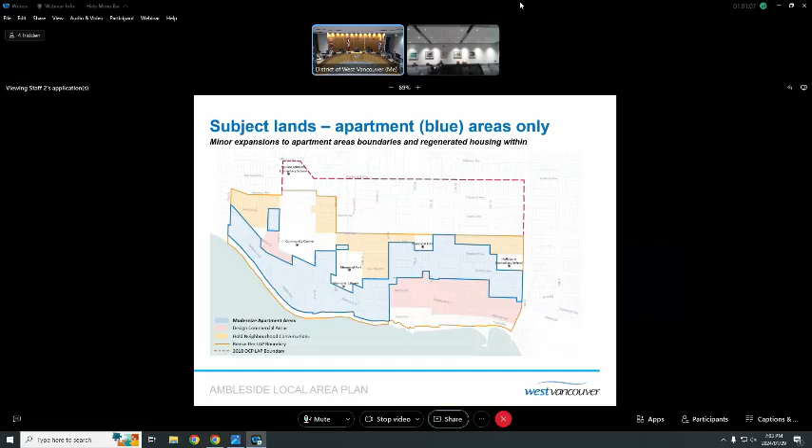Also, just to be very clear about the subject bylaw, I'll describe its nature. It relates to the OCP, or Official Community Plan. Council already has within its Official Community Plan policies that relate to the existing apartment area, and this would update those. The function of an OCP is to identify the kinds of housing that council could consider and where. Importantly, the OCP also includes design guidelines specific to the apartment area.

No changes to these are proposed. So the design guidelines regulate things like the look and feel, the design of buildings.

I'll also take a moment to clarify what tonight is not about. So this is an OCP amendment as described. It's an area-wide long-range policy document. It's not changes to zoning.

So included within that statement, it's not a reconsideration of protecting the 30 purpose-built rental sites. I'm flagging that just because I'm aware there's been significant public interest and correspondence. That bylaw was defeated at the end of November last year.

Council can, of course, direct any next steps for those sites tonight or at any open meeting, but should council choose to do so at any time, that would be a separate bylaw, i.e. the zoning bylaw, not the OCP. So a long way of saying that the OCP bylaw in front of council tonight can proceed irrespective of any potential direction council may provide regarding the zoning of the 30 purpose-built rental sites.

Thank you, Mr. Hawkins. Just on that note, I believe that council will give direction on that issue of protecting the rental housing sites sometime in the not-too-distant future. Thank you. Perfect, thank you, Your Worship.

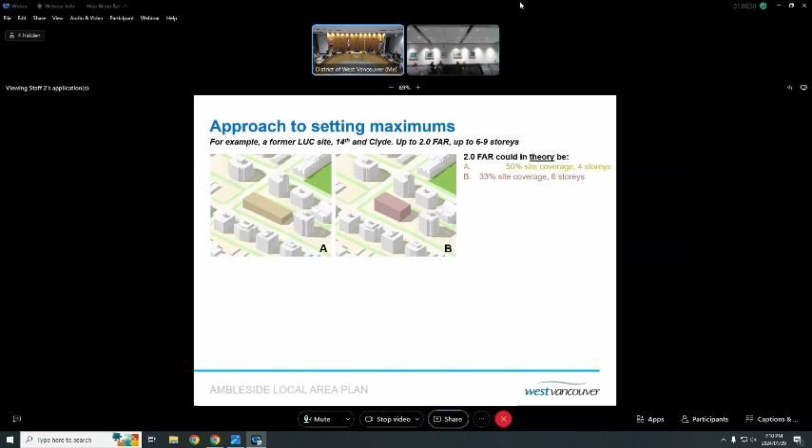Could have even less site coverage, 25%, and be 8 stories. So this is just a theoretical massing exercise to illustrate how density and height work together.

In practice, not in theory, what would really happen is that should council adopt this bylaw, those maximum up to heights and maximum up to FARs provide an envelope. It would be owners that determined if they wish to apply. Market economics would very much inform what was a viable project.

Architects would shape a site-specific response. Staff would review using things like those design guidelines I mentioned. And ultimately, it would be council that decided based on the fit, so what the building looks like, but also what the building contains, its housing.

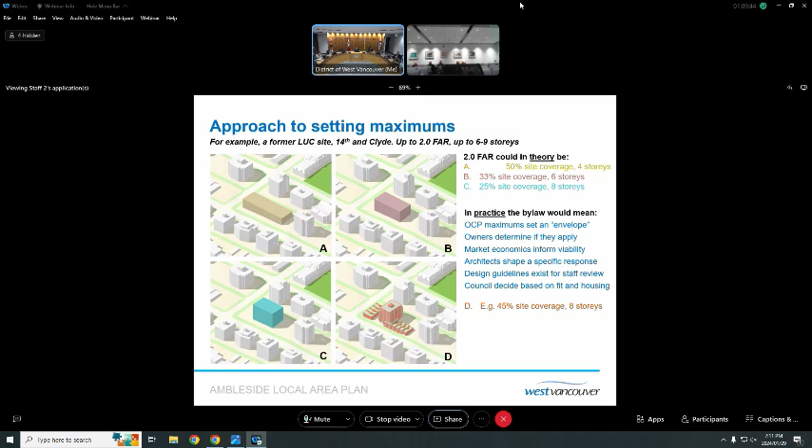And so it could be that this kind of policy would enable something like image D on the screen there, where it could be 45% site coverage, 8 stories, but a narrow 8 stories located in the space between the two buildings abutting to the north, with things like townhouses fronting the two streets.

So you could get a mix of the 3 and 4 bedroom townhouse units, as well as the 1 and 2 bedroom apartment units. So it's just an illustration, but it's trying to describe the kinds of things that policy can enable over the coming decades.

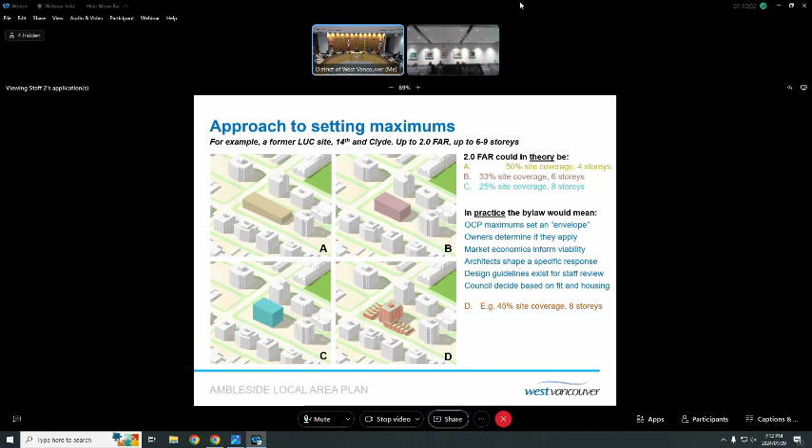The previous bylaw indicated a maximum infill across the site, total FAR of 3. The options in front of Council now in the revised bylaw provide a staggered approach, a more nuanced approach.

So we're proposing if the infill building is strata, it would be 2.5 FAR, gross total on the site. If there's a sort of interim combination of strata and rental or rent to own, that would be 2.75. And then the 3.0 maximum FAR could be applied not only to rental projects, but also to co-op infill.

And for full transparency and awareness, the proposed policy I'm describing on this slide still retains the language that heights would be determined through contextual review of the proposal. It's the only policy in the revised bylaw that includes that language. All others have been specified.

And this is really just having done the analysis, we have 3 sites, 3 contexts, 3 amounts of available space where an infill building could be located. And now with greater options, we also have 3 different scales of density. So it makes picking an absolute limit a little arbitrary, if you like.

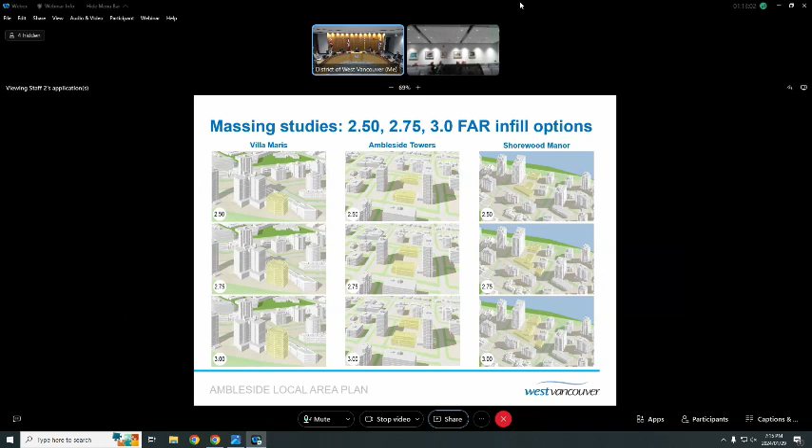Could be a 1, 2, or 3 building proposal, depending on unique site conditions and varying densities. So I've already begun moving on to the visualization piece, which was one of the key inputs staff received in October, the desire to provide illustrations so the words don't float in an abstract way, so people can really understand what these bylaws could lead to over the coming decades.

Our approach has been to prepare an appendix, Appendix C, attached to the report and the bylaw. These images show existing buildings, always in white, modelled to scale and to reflect the topography and slope. In colour, potential buildings are indicated, colour-coded to the various proposed policies. These are massing studies, and we've included a range of different angles and perspectives, some close-up, some wider, looking in different directions.

A few important caveats: Appendix C does not show actual buildings. There's no detailed design, no particular architectural response proposed, no landscaping, texture, or character. Real buildings would have doors, windows, trees in front, and so on. The images do not show approvals or even applications—we're not at the application stage. Policies would guide applications, but should Council adopt these policies and applications be received, they would be subject to detailed design review and Council decision-making.

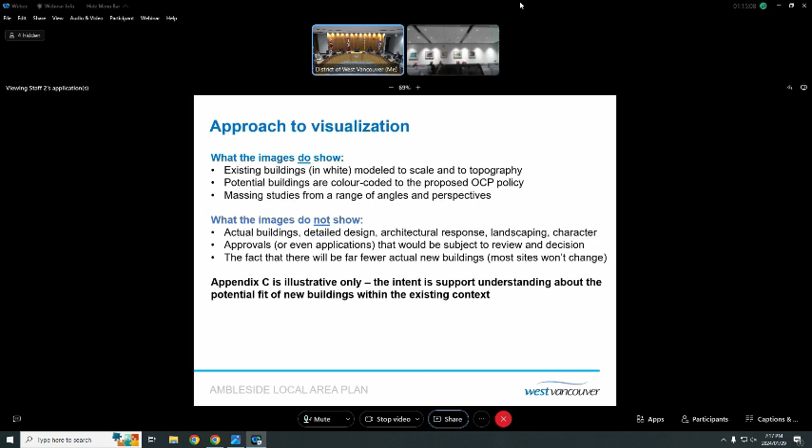They also don't show that there will be far fewer buildings than the total build-out illustrated, because the density increases are by and large quite marginal, meaning most sites won't change, at least within the 2041 OCP planning horizon. So the invitation is to view Appendix C as illustrative in nature, intended to provide council and the community as much understanding as possible about the potential fit of new buildings within Ambleside's context.

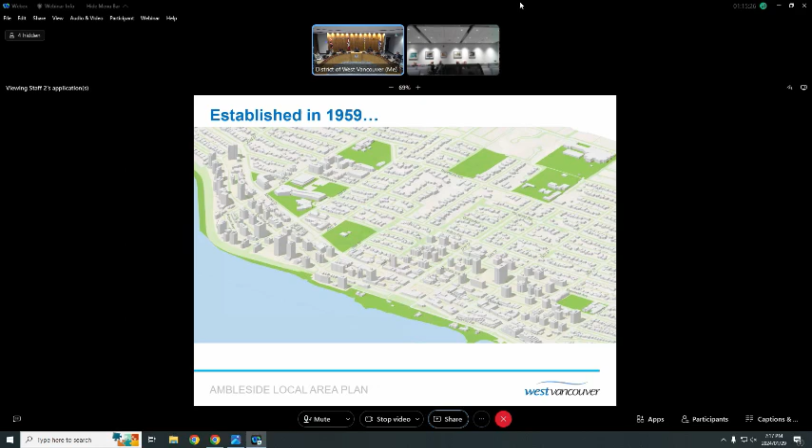Appendix C is fairly long, I'll only provide a few examples. Looking northwest, here are the existing conditions—what we have on the ground today is the result of a decision made in 1959. The appendix illustrates how, question mark, perhaps by 2059, these kinds of housing could fit and relate to existing buildings, slope, and context based on these massing studies.

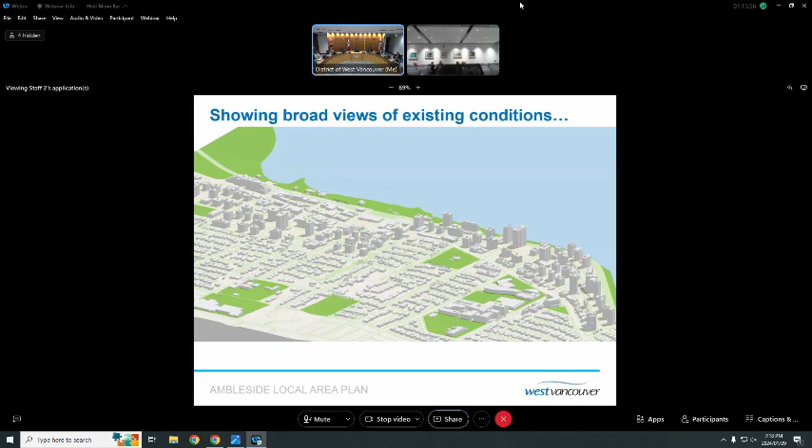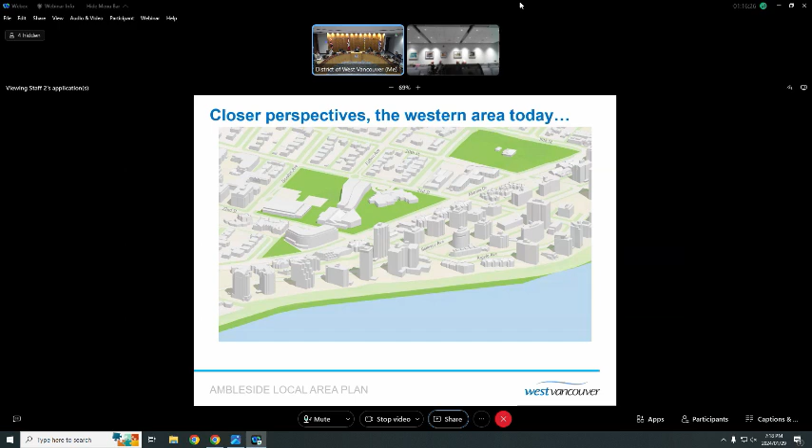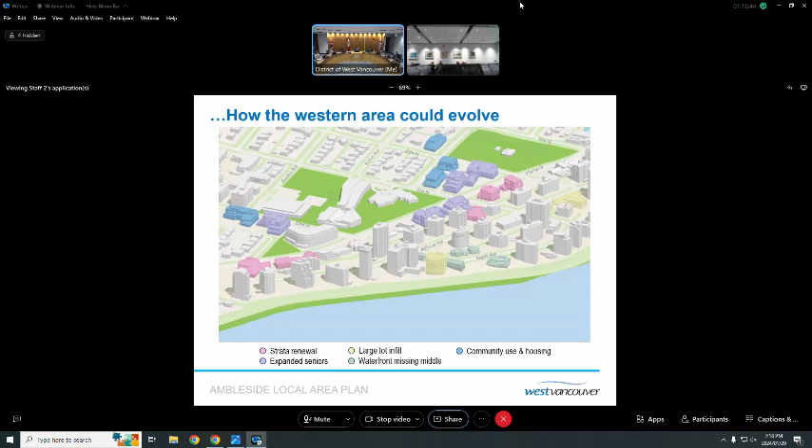The appendix also includes closer perspectives. This is the western area—at the foreground you can see Bellevue Avenue with existing high-rises, transecting the middle is Marine Drive. The large green parcel to the right is Memorial Park and the Rec Centre, with Ice Arena and Senior Centre to the left. The policies would enable things like green buildings, waterfront townhouses, missing middle. Yellow buildings represent infill on large sites, pink buildings new strata ownership, purple expanded seniors housing on site, and blue the ability to accommodate both community use and new housing opportunities.

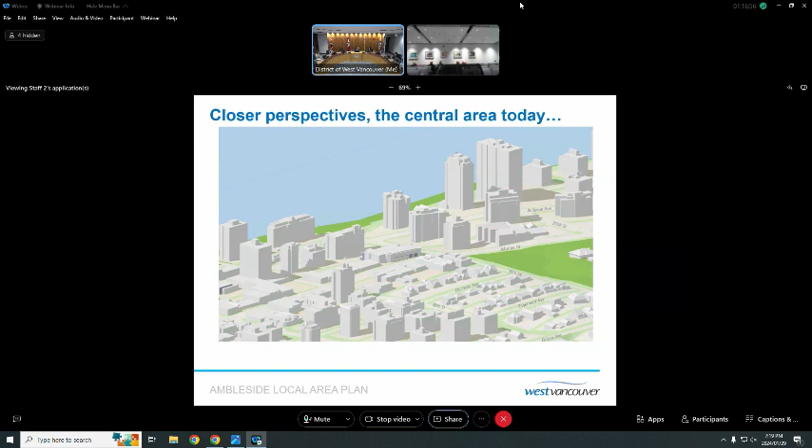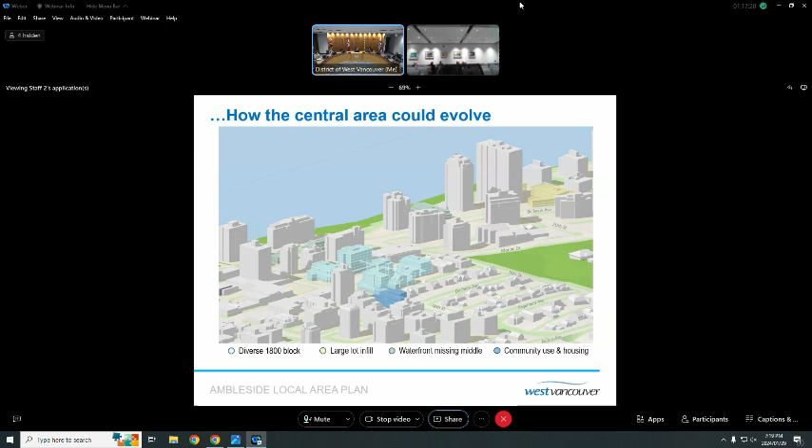The central area—in the background, high-rises on Bellevue; foreground, high and mid-rises off Duchess and Esquimalt. The key part here is the lighter blue, the 1800 block, illustrating the range of potential 4, 5, 6, 7, 8-story residential uses as a way to connect the western and eastern apartment areas, and more importantly provide much more living opportunities directly adjacent to the village, which staff believe would support a vibrant village and local businesses.

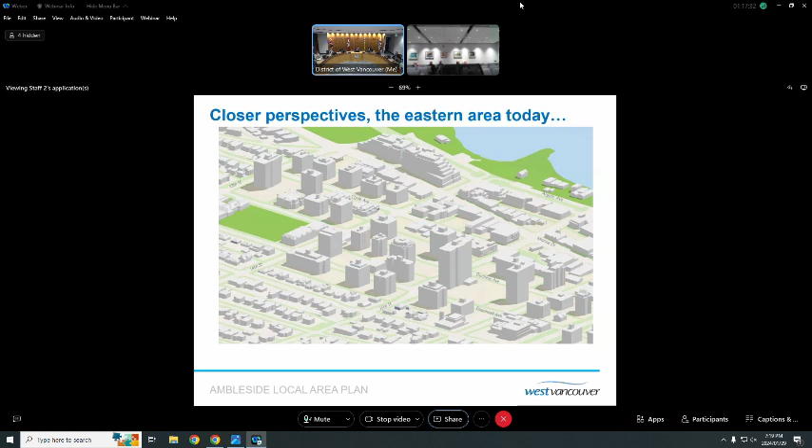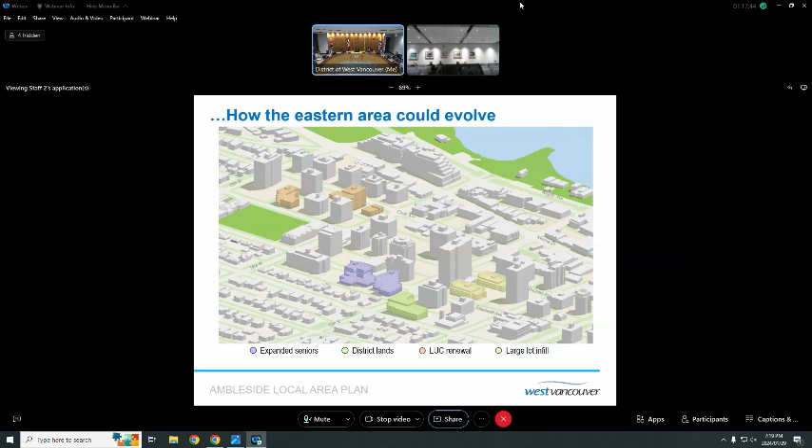Finally, moving to the eastern area, looking northeast—the Grosvenor building is perhaps most recognizable in the background. Again showing how the area could evolve over coming decades: in brown, renewal of land use contract sites; in purple, seniors housing; green, the district-owned lands close to where we are; and yellow, an example of infill on one of the large lots.

So, in conclusion, staff are recommending Council commence consideration of the revised OCP bylaw, which would involve giving it first reading and setting the date for a public hearing, because to the best of staff's ability and understanding, we think it reflects what we heard from the community in terms of the housing opportunities they'd like to see, and the priorities they have in terms of meeting their future needs. It responds to Council's direction from July and October. It provides a broad range of all those different housing types, and also, we hope, in a very balanced way between those various needs. And it intends to situate those through these visualizations within Ambleside's established context. And that concludes staff presentation, with thanks.

Thank you, Mr. Hawkins. Members of Council. Mr. Hawkins, just as we go through the process, if I know members of Council have talked about doing a community forum before the public hearing so that there's an opportunity. We actually suggested you and I do it. We've had a little history in life of doing a presentation so that people can come in a much more informal sense and ask questions and have discussion. But if we do that, is there an opportunity? At what stage can we make amendments? Let's say we got through this and there's a lot of focus in this bylaw that there's a limit on the number of stories, and what if we go back out to the community through an engagement and they say, 'Ooh, actually that blocks our views. It would be better to have a taller, skinnier building.' Can we make amendments to these bylaws before the public hearing or at some stage?